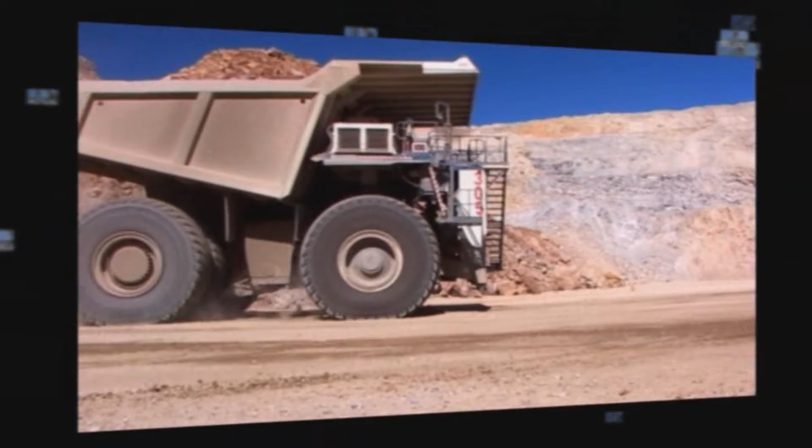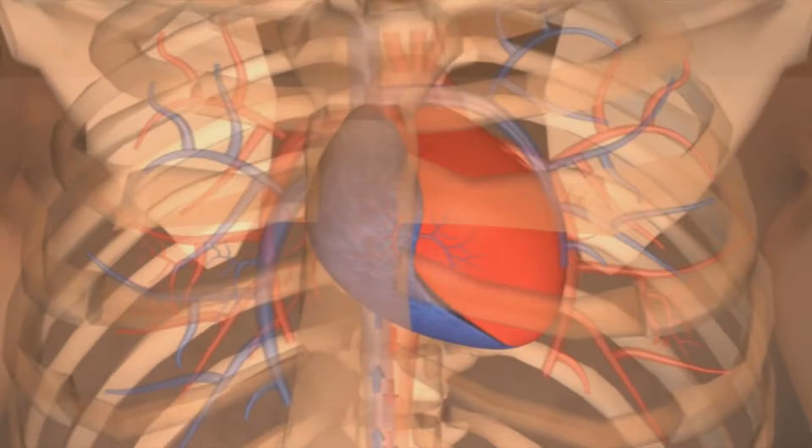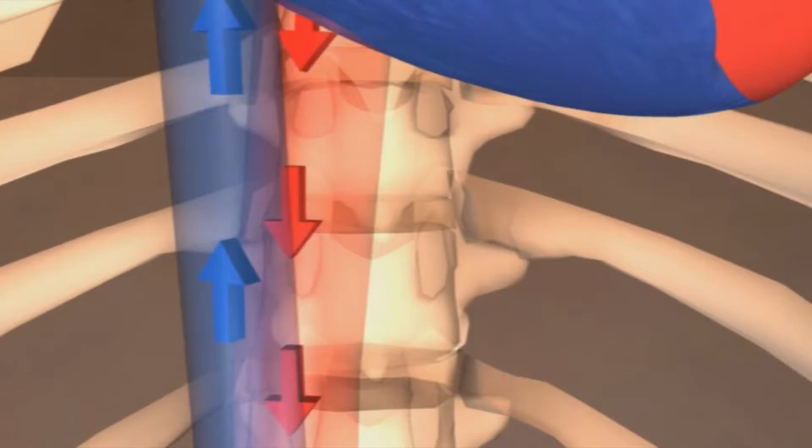It should come as no surprise that the key elements in today's powerful hydraulic systems bear so much similarity to the remarkable technology within the human body. The hydraulic pump is much like the heart. The tubes, flexible hose, and couplings are like the blood vessels of the circulatory system. And the hydraulic fluid is like blood, which is filtered by the life-sustaining kidneys.

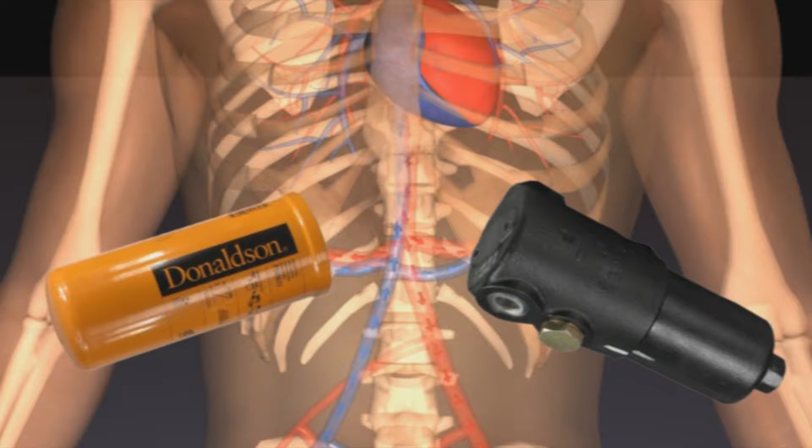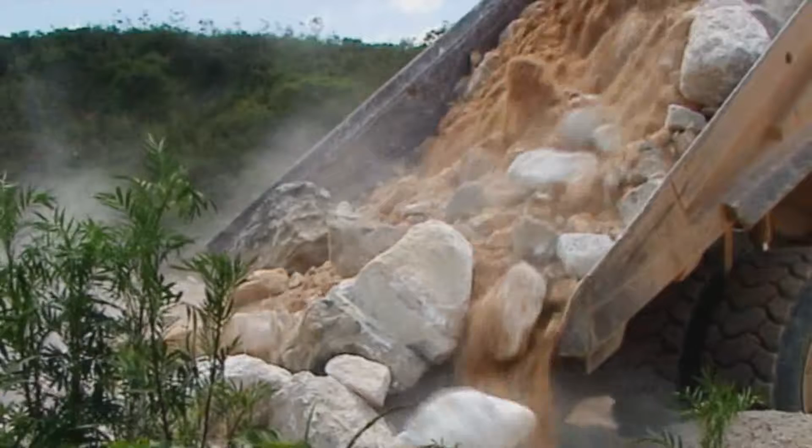Our interest is primarily in filtration technology, which in the hydraulic circuit removes a whole spectrum of impurities, like the kidneys do. Unlike the human hydraulic system, which under normal circumstances is self-sustaining, man-made hydraulics needs careful servicing and maintenance. 70 to 80% of hydraulic component failures are attributable to contamination in the oil.

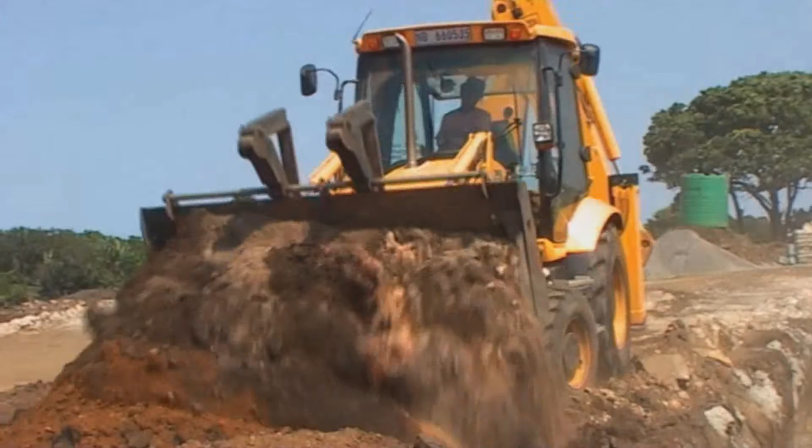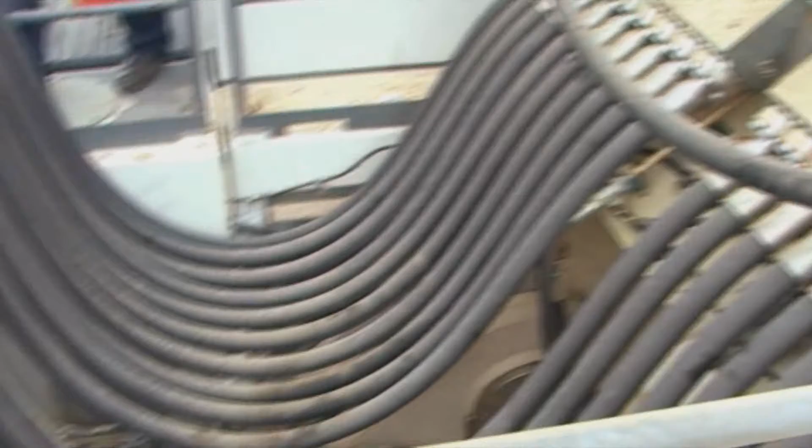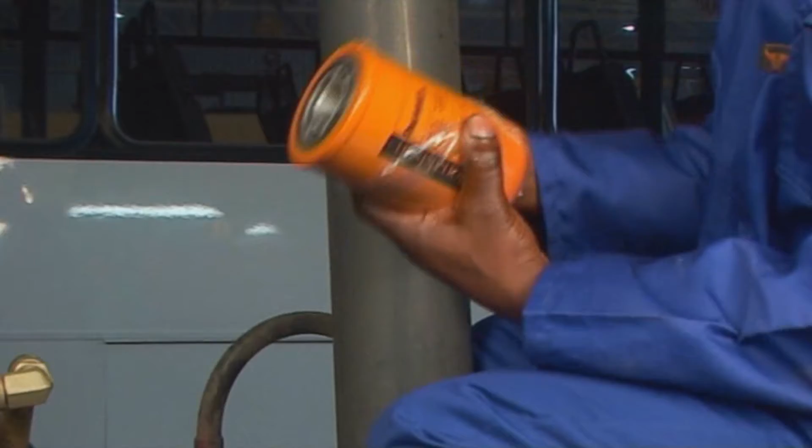Because hydraulic power is often the prime force in big projects, downtime of stationary and mobile equipment can result in large losses and unexpected expense. Besides its destructive effects on the system components, contamination of the oil has other multiple negative consequences. The hydraulic system loses some of its energy and lubricating capacity, as well as its ability to transfer heat, and leakages are produced. This Donaldson training module will provide guidance in proper filter application and contamination control.

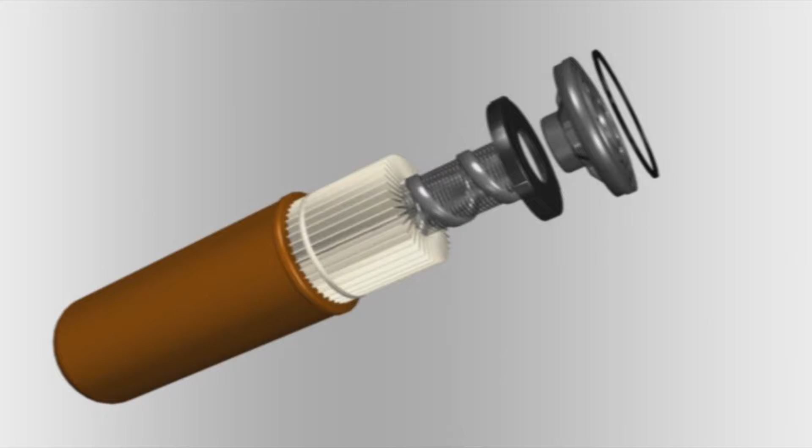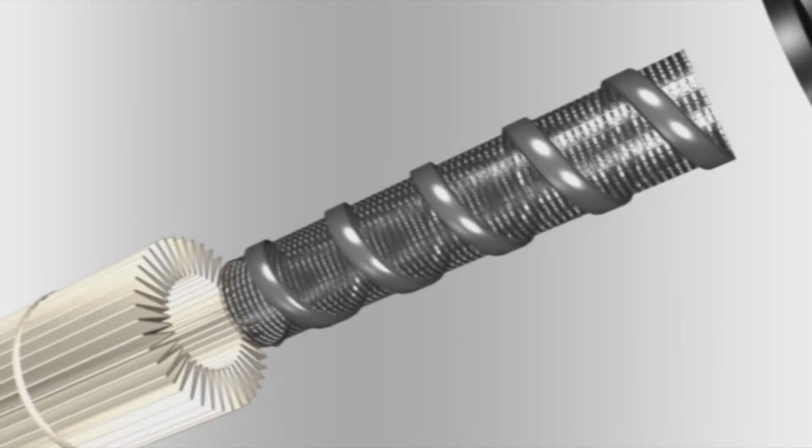Here are just a few design highlights of the Donaldson spin-on liquid filter, which is made for durability and consistent quality. The Donaldson louvered center tube and spiral lock seam allow more flow area. There is also greater collapse strength, and the smooth surface eliminates wear on the filter pleats.

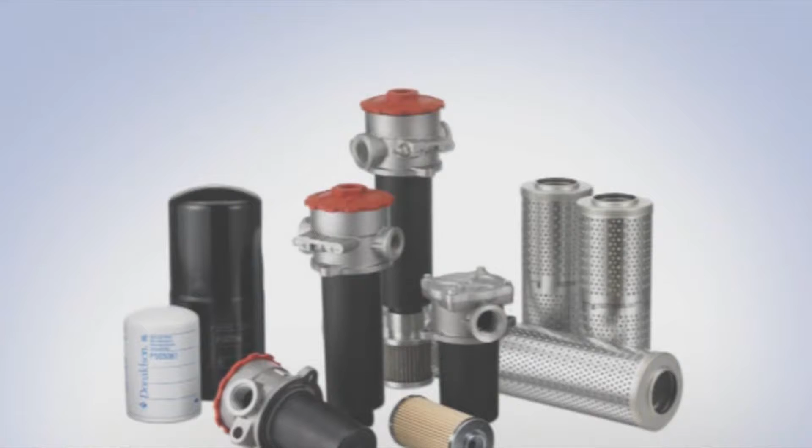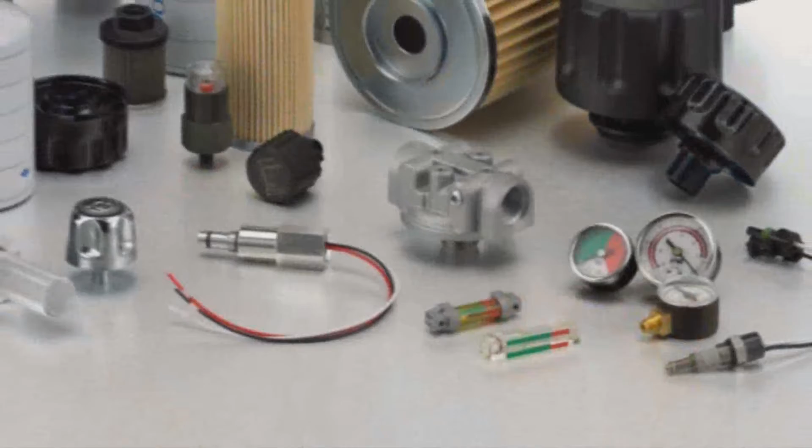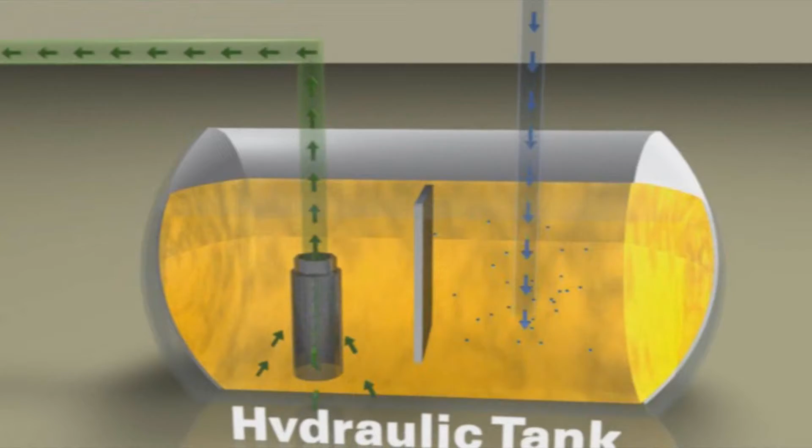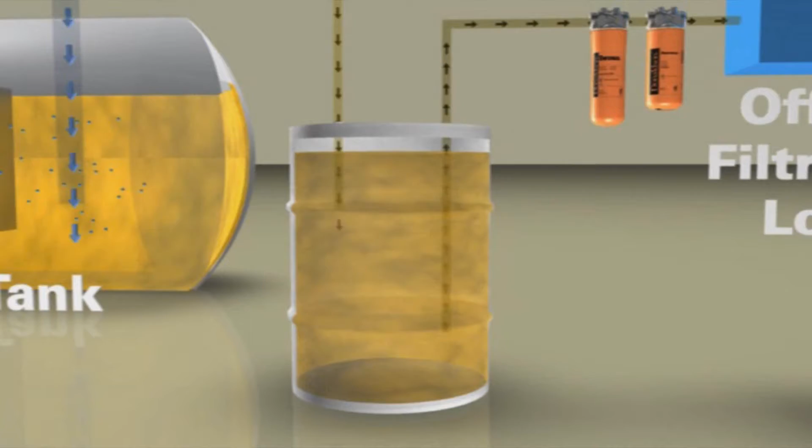Reservoir accessories. Let's look into the hydraulic oil holding tank. It's here that most of the contaminant finds its way into the oil. First, it's important to note that new hydraulic oil is not pure. At an approximate ISO cleanliness level of 22-21-18, it is significantly higher, that is, less clean, than OEM standards. This has prompted a leading global heavy equipment manufacturer to recommend filtering new oil before pouring it into the hydraulic tank.

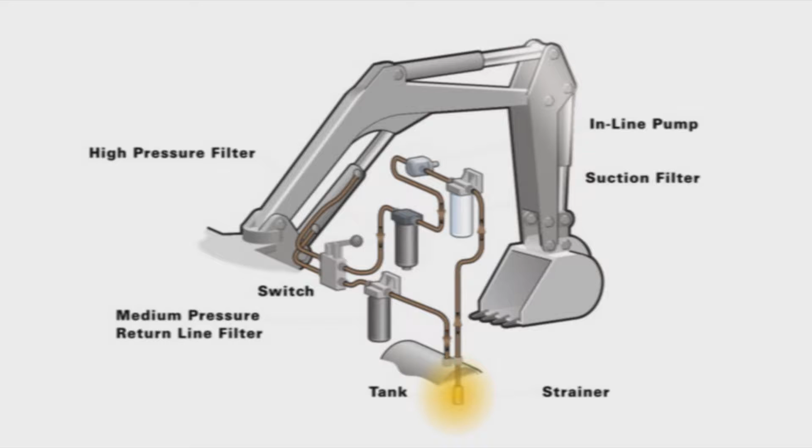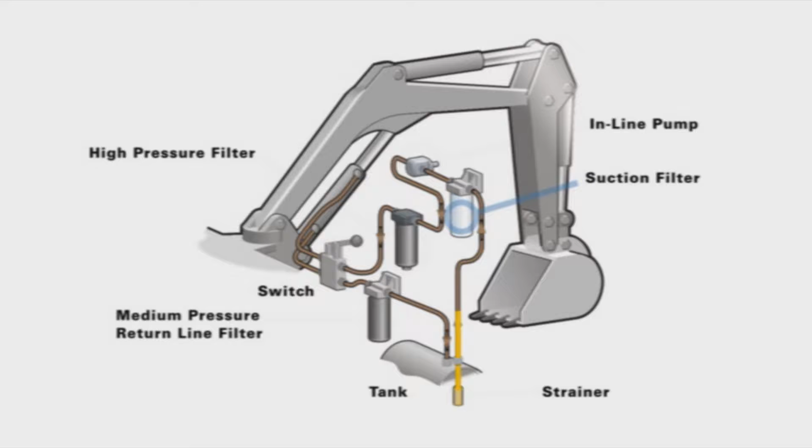Water can also enter the hydraulic system via the holding tank when moist air inside the tank condenses as the outside air cools. Here is a grouping of Donaldson in-tank filtration products for hydraulic systems of various applications and sizes. Looking at this animated hydraulic circuit, note how the oil is drawn through a strainer in the tank, which removes larger debris. The oil then goes onward into the low-pressure pump-protecting suction filter. Low-pressure filters are the most commonly used type in a hydraulic circuit.

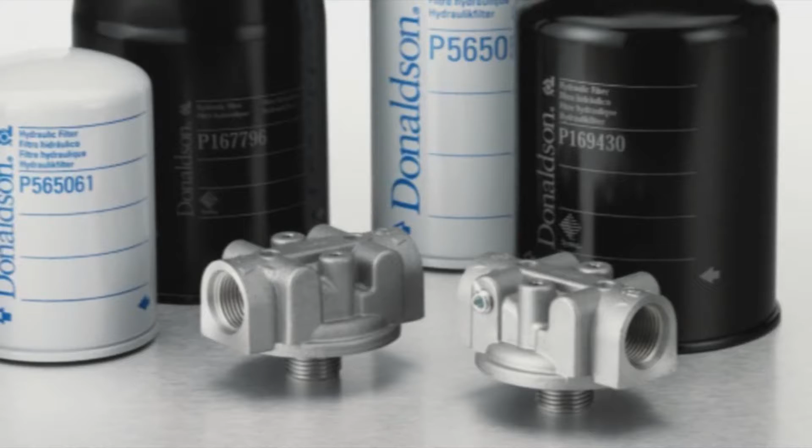Donaldson has a broad product line of low-pressure spin-on, cartridge-style, and in-tank filters for solving filtration challenges in virtually any application. From here, the oil, which has been filtered of potentially damaging particulate matter, goes through the inline pump. It is then filtered again in the high-pressure section of the circuit. This second filtration is to protect the expensive hydraulic components, the muscles of the system, from particulate and debris.

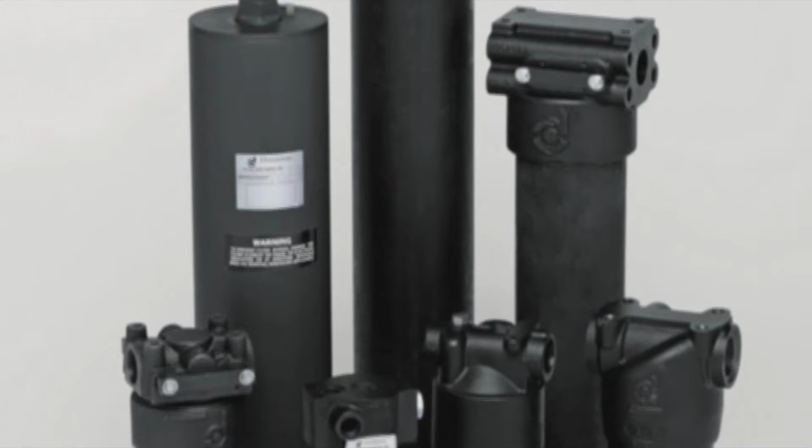All of our high-pressure filters contain Donaldson's Synteq synthetic filter media, specially developed by Donaldson for high-efficiency liquid filtration. After doing its work, the hydraulic oil proceeds back to the holding tank. It first passes through the medium-pressure return line filter, which removes contaminants generated during component activity.

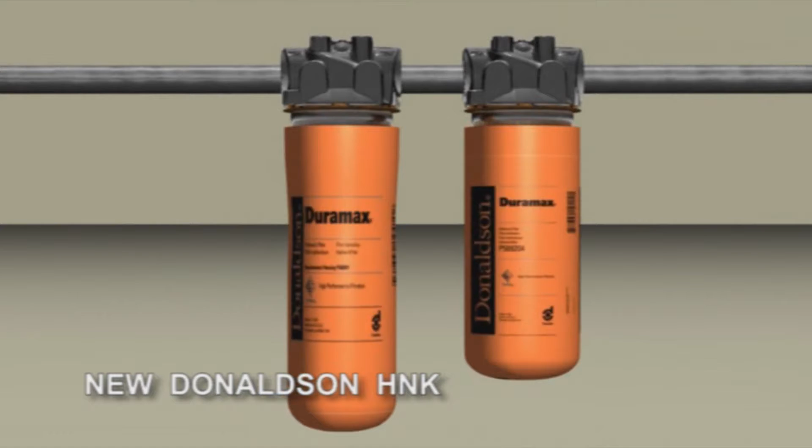Ideal for medium-pressure application in the circuit is the Donaldson Duramax series. Duramax is well known as the highest-rated spin-on style filter available and is most often used in return line positions. This new Duramax filter allows you to choose between a spin-on or bowl cartridge-style filter without changing heads.

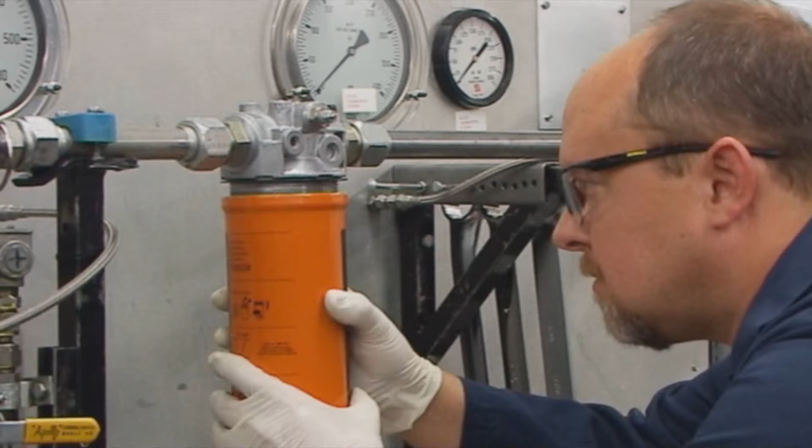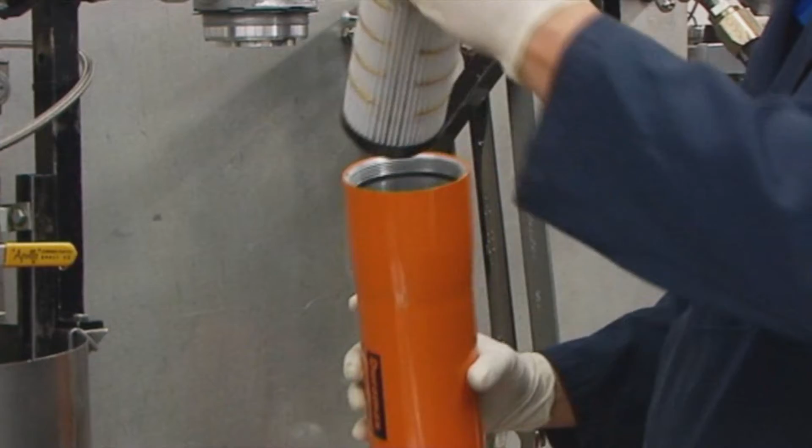The new filter interface makes service easier and provides reliable sealing without having to torque to specification. Its improved performance is a necessity in some applications for meeting ever-increasing system cleanliness requirements.

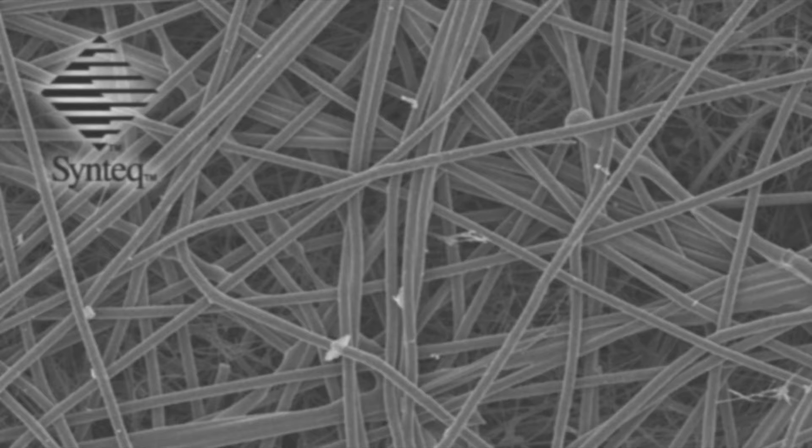Although cellulose media will suit some applications, others may require Synteq synthetic media in medium-pressure applications. For the same media area, the Synteq media gives a lower pressure drop than the cellulose media due to thinner fibers.

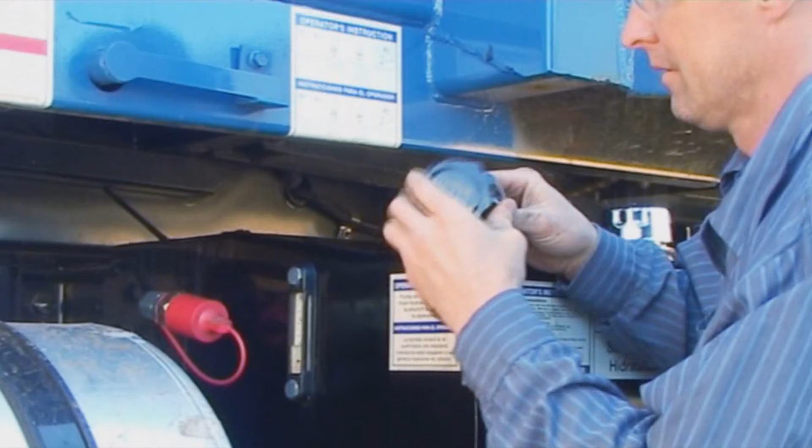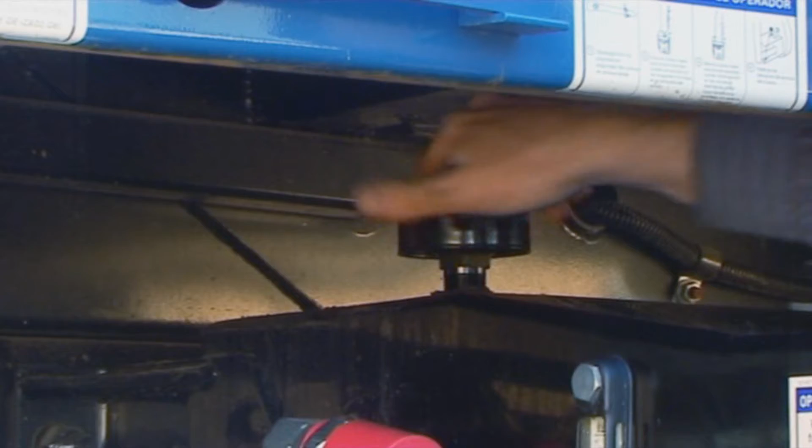Donaldson's highly effective series of breathers is a first line of defense against moisture and particulate in the air. It includes thermally reactive advanced protection, or TRAP breather technology. This is an entirely new technology that begins working faster and provides better moisture protection for hydraulic and lube oil reservoirs. This technology allows only dry air to enter the reservoir as the system breathes in.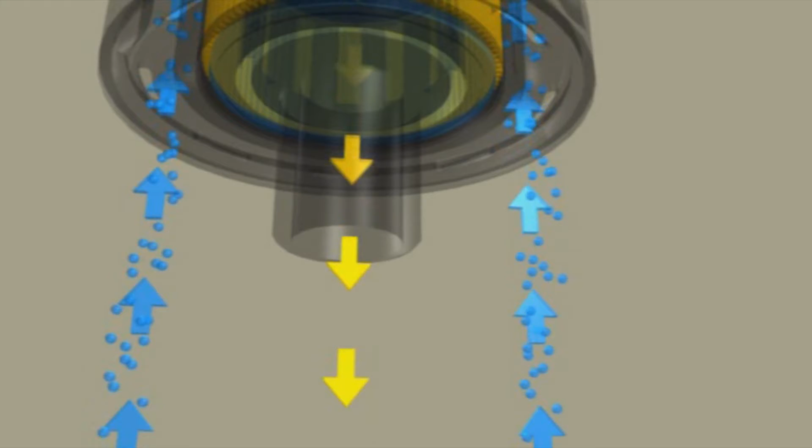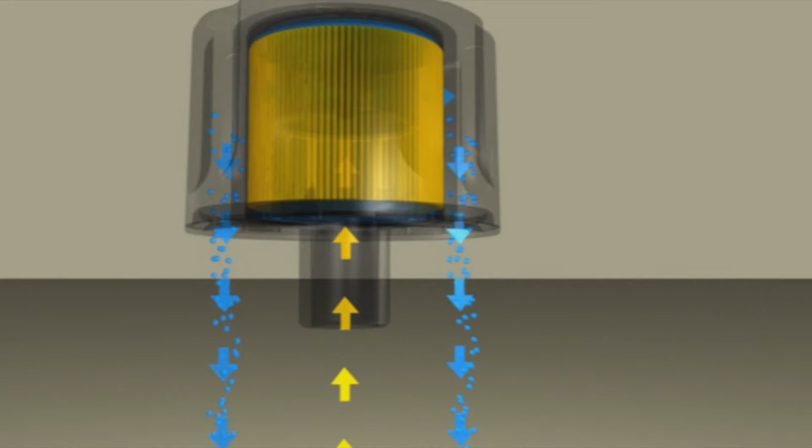When the tank exhales during the normal day-night temperature cycle, this exclusive, innovative Donaldson breather technology continuously regenerates breather water-holding capacity. This is in contrast to desiccant breathers that require frequent change-out.

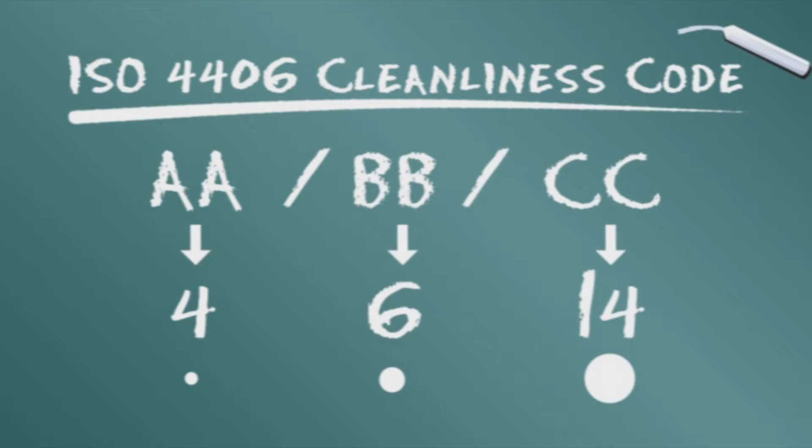A brief word about the ISO cleanliness code, which is important in determining the condition of hydraulic oil. The ISO 4406 cleanliness code uses 3 separate numbers to describe the cleanliness of an oil sample. Measurement is taken of particulate sizes at 4 microns and greater, 6 microns and greater, and 14 microns and greater. The resulting figure, say 18/16/13, is the ISO cleanliness code level.

Suggested ISO 4406 code cleanliness levels have been published. On the stringent side, for example, a 15/13/10 code level may be specified for servo valves with very close tolerances. A less demanding 26/24/20 would be suitable for low-pressure systems with large clearances.

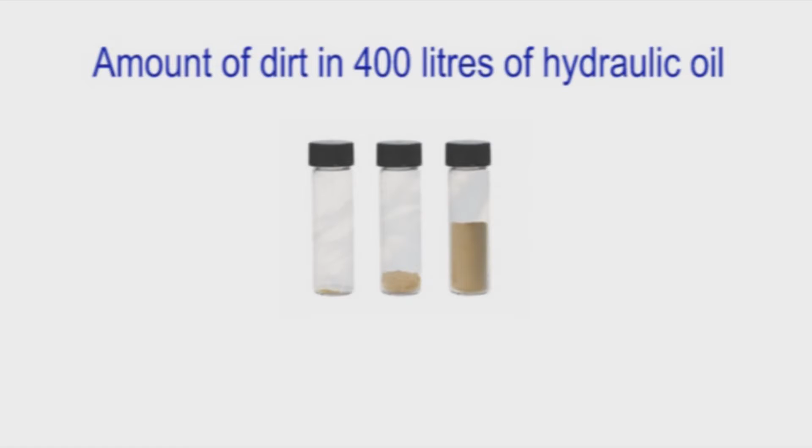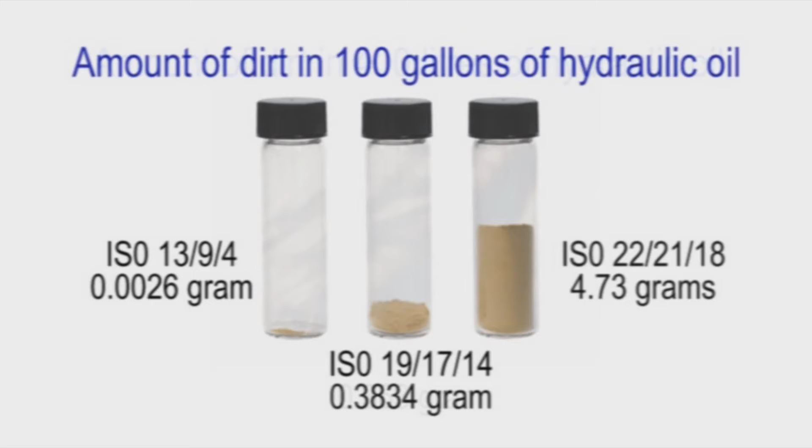Looked at another way, the dirt in these 3 glass containers each represents a different ISO 4406 cleanliness level. From a tiny fraction of a gram on the left to about 1/3 of a gram in the middle to almost 5 grams of dirt on the right. Note how the 3 cleanliness code numbers also get progressively higher to indicate more dirt and less oil purity.

Most component manufacturers specify filtration level recommendations using the ISO code. This code will help you select the filters with the right Donaldson media to meet manufacturer specifications.

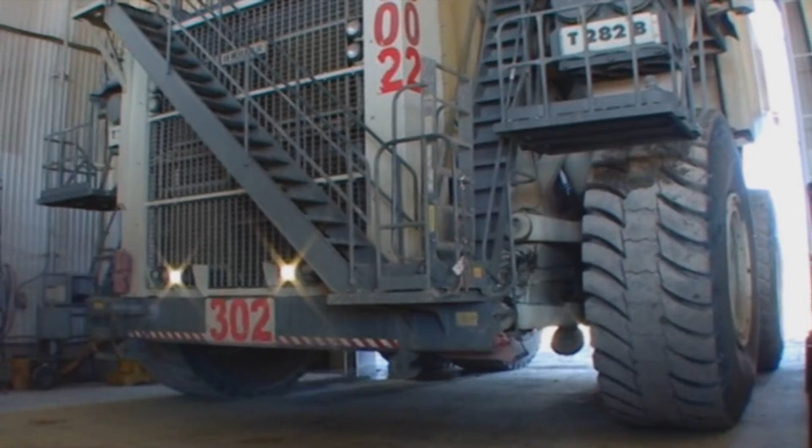There's more to know, however, about contaminants which destroy hydraulic components and bring some of the world's largest vehicles and machinery to a halt. Contaminants in the hydraulic system include solid particles such as sand, silt, and metal, solvents, water, air in several forms, and soot.

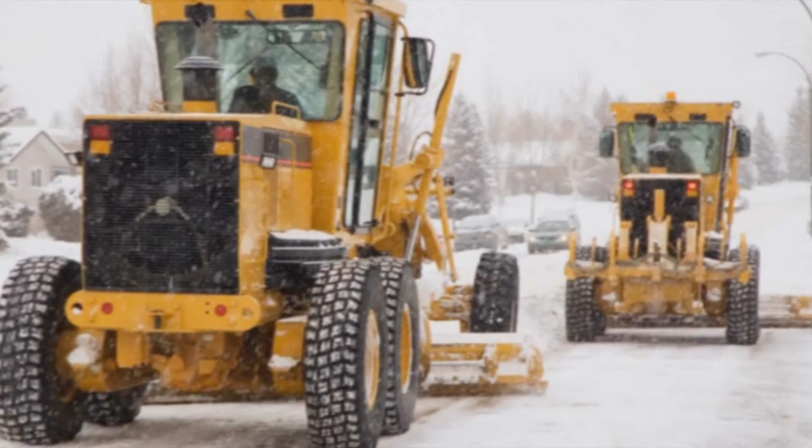Water in your hydraulic system means trouble. Water is more compressible than oil and has no sealing or lubricating ability and will negatively affect the performance of the hydraulic system. Other contaminants, such as sand, enter the system in various places, such as worn wiper seals. Inadequate breather efficiency also allows dirt to ingress the holding tank.

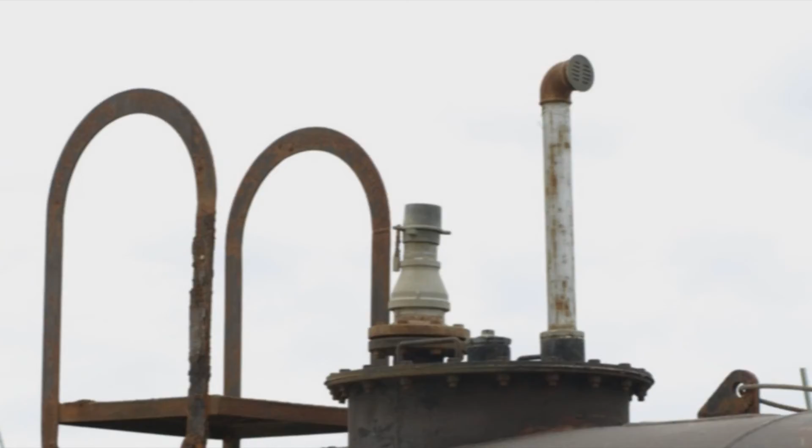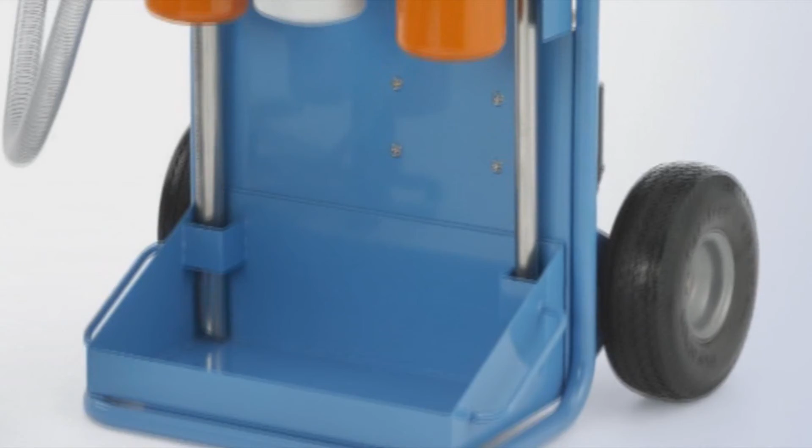There are situations where offline filtration can be used to supplement existing filtration to achieve target ISO cleanliness levels. For these offline applications, choose from systems such as the Donaldson Turnkey Filter Panel or Portable Filter Cart and Filter Buggy.

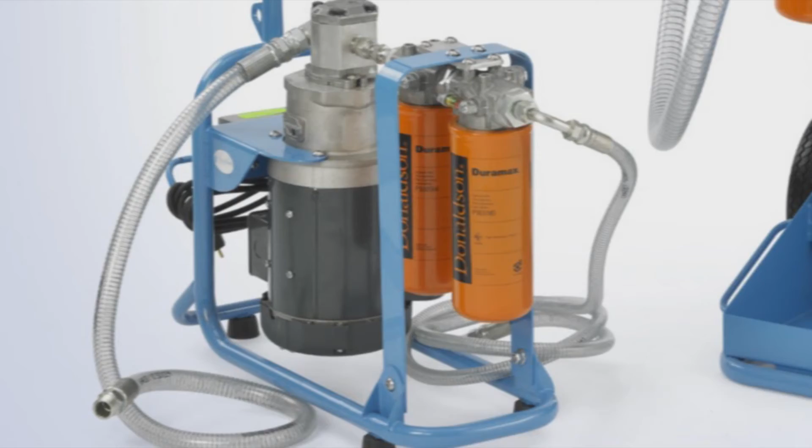Analysis of your hydraulic oil is another important part of protecting and maximizing the life of hydraulic systems. Hydraulic oil from equipment in regular use should be sampled at 500 hours or monthly. The Donaldson Hydraulic Oil Analysis Service, which is described in Module L6, includes an evaluation of the test results and specific recommendations and warnings of imminent component damage where warranted. You can also learn how to extend your hydraulic oil drain intervals.

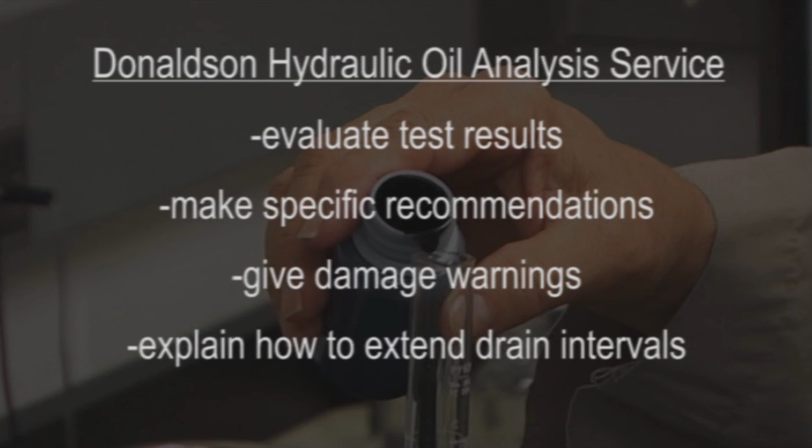This servicing information is provided as a best practices guide. It is not, however, intended to replace or supersede the service instructions supplied by your engine or vehicle manufacturer.